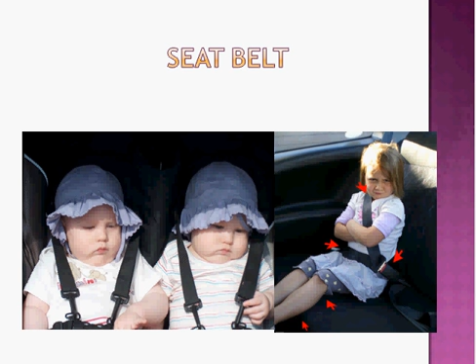According to the World Health Organization, road accidents are a worldwide problem and now result in over 1.2 million people dying every year from road crashes around the globe. Seat belts and airbags are highly effective in preventing death and injury from traffic collisions. Seat belts are expected to reduce the overall risk of serious injuries in crashes by 60 to 70%.

Seat belts, also called safety belts, are designed to secure the occupant of a vehicle against harmful movement that may result from a collision or a sudden stop. They are designed to deliver non-recoverable extension, and are intended to reduce injuries by stopping the wearer from hitting hard interior elements of the vehicle or other passengers.

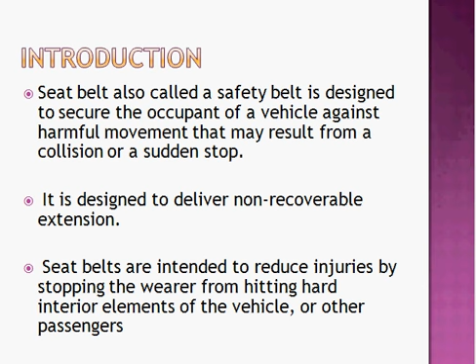Next, we come to the seat belt market scenario. First, we will discuss the global market for seat belts. According to a market research firm, the market for all types of narrow fabric is estimated at US $2.4 billion in 2005, projected to grow at about 3.6% per annum during 2005 to 2010.

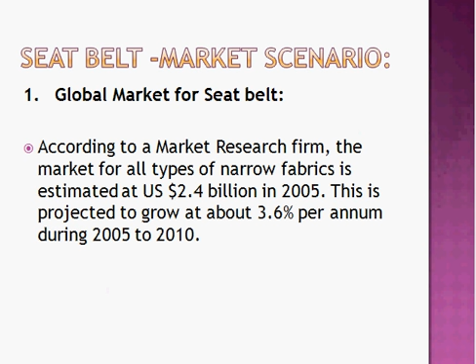Next is the domestic market for seat belts. The growth in seat belt usage is expected to be more than the overall growth in passenger cars, due to the stronger growth of high-end cars with more seat belts. The domestic production of seat belt webbing is around 4.3 million meters.

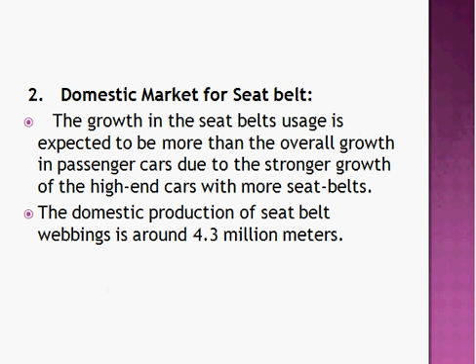Next, we will discuss the types of seat belts: lap seat belt, sash seat belt, lap and shoulder belts, 3-point belts, 5-point belts, and inertia reels.

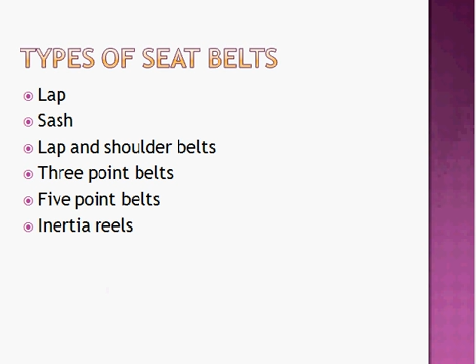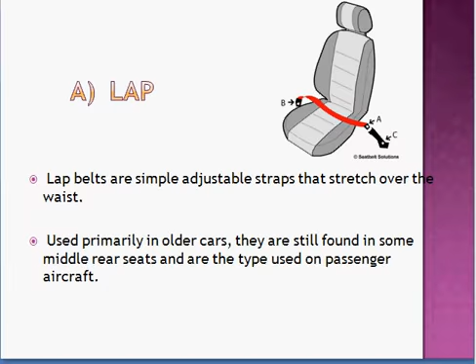First, lap seat belt. Lap seat belts are simple adjustable straps that stretch over the waist. Next, sash belts, an adjustable strap that goes over the shoulder, used mainly in the 1960s but of limited benefit because it is very easy to slip out of in a collision.

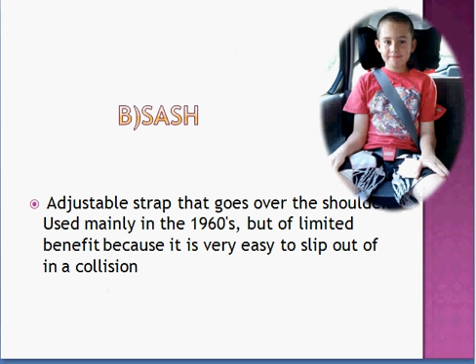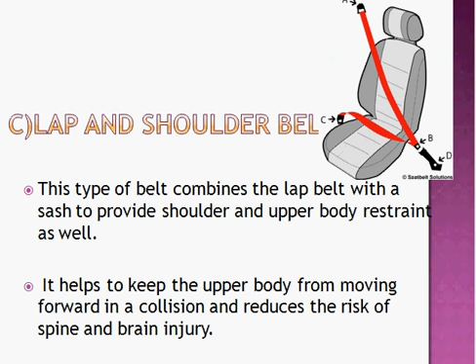Next is the lap and shoulder belt. This type of belt combines the lap belt with a sash to provide shoulder and upper body restraint as well. It helps keep the upper body from moving forward in a collision and reduces the risk of spine and brain injury.

3-point belts: these belts are similar to lap and shoulder belts but are made up of one continuous length of belt material that avoids the stud-based mounting system. Instead, it weaves the fabric through the frame itself and then across the body into the locking mechanism. This design allows the belt to equally spread collision energy over the shoulders, chest, and pelvis.

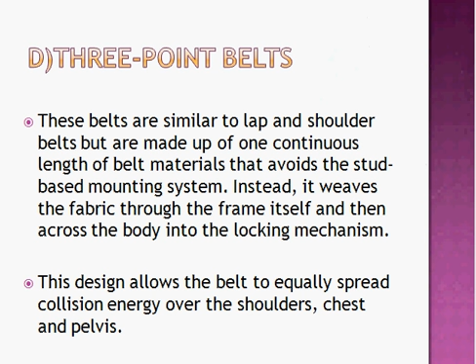5-point belts, most often found in race cars and child safety seats. This style is more restrictive than other safety belts and considerably safer. Essentially, two combined shoulder belts, each mounted to the frame for added safety and stability, are connected to a belt and strap between the legs to accomplish the 5 points to fully restrain the body to the seat and vehicle.

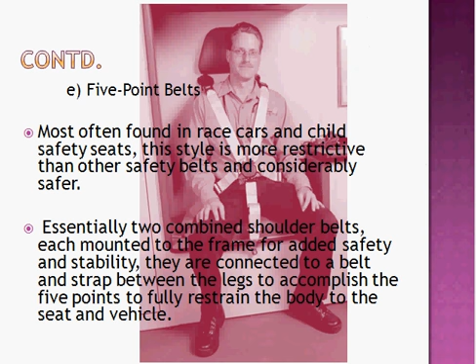Last but not least, inertia reels. Not technically a safety belt, inertia reels are integral in making seat belts more comfortable without losing their inherent safety. These allow the belt to be adjusted for fit and comfort by letting out as much belting as is needed under normal conditions.

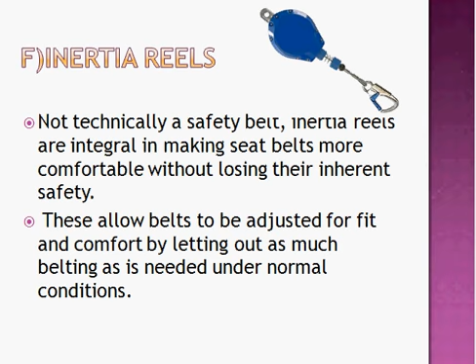Now we will discuss the importance of the seat belt. The job of the seat belt is to hold the passenger in place so the passenger is almost part of the car, which prevents the passenger from flying forward as the car stops abruptly in the case of a collision.

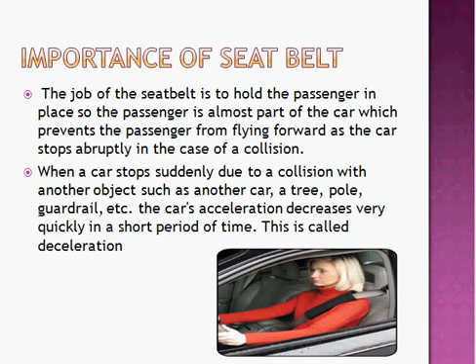Now we will discuss the fiber used for seat belts. Raw materials used for seat belt webbing are nylon, PET, and its derivatives like HTPY.

Nylon was utilized in some early seat belts, but due to its high UV degradation resistance, polyester is now widely used worldwide. Also, polyester scores over nylon because of lower extensibility and higher stiffness.

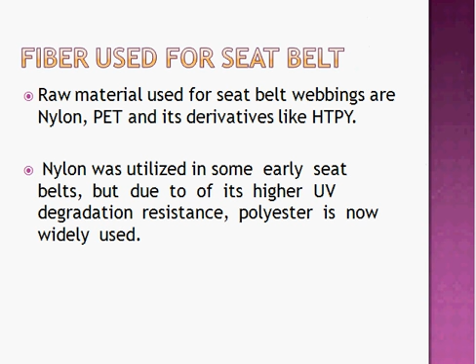Next is the fabric structure. Seatbelt structures can be single layer or double layer and manufactured on needle looms with plain weave, twill weave, or satin weave. Normally a 2x2 twill structure is used.

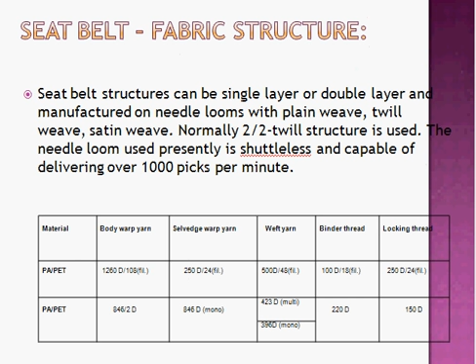The needle loom used presently is shuttleless and capable of delivering over 1000 picks per minute. The seat belts are made from nylon filament yarn or polyester filament yarn, which is woven to produce the webbing pattern. Next is the manufacturing method.

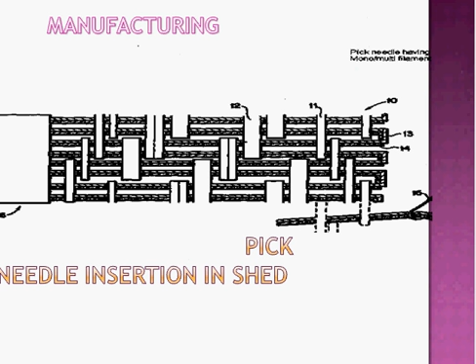This figure shows the pick needle insertion in the shed, and the next one is selvage formation with catch cord yarns. In the needle loom, the weft is inserted from one side of the warp sheet, and here a selvage is formed. The other side of warp is held by an auxiliary needle, which manipulates a binder and a lock thread.

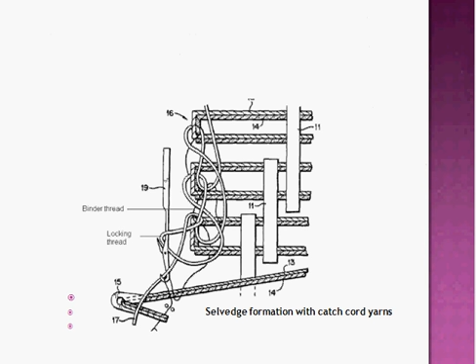Once these are combined with the weft yarn, a run-proof selvage is created. Special care is taken when constructing the selvage to ensure it is abrasion resistant. It is equally important to ensure that the selvage is soft and comfortable to wear.

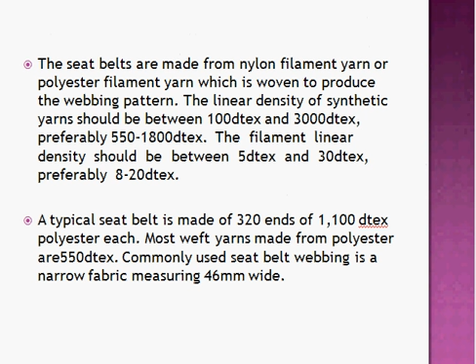In a needle loom, monofilament and multifilament weft yarn is moved across the width of the web in a single shed. A high tension is applied to the monofilament compared to multifilament yarn so that it does not protrude beyond the selvage. Monofilament weft yarns are rigid yarns that provide good stiffness across the web and high resiliency.

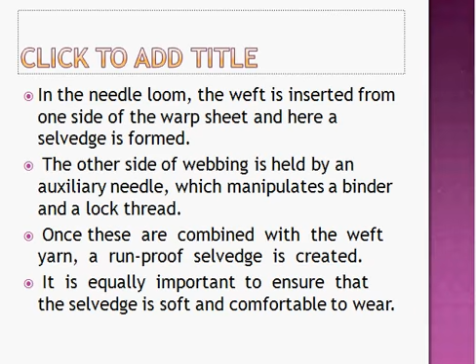Monofilament weft yarns are used under high tension, which controls webbing softness and round shape together with catch cord yarns and finer warp yarns in the selvage than the body of the webbing.

Low longitudinal stiffness and a thinner web give good winding performance with the use of smooth monofilament weft yarns. Selvage warps have about 66% lower thermal shrinkage than body warp threads. Weft threads have 16% higher dry heat shrinkage than selvage yarns. Thus, the woven ribbon is heat-set after dyeing, giving a soft, round-shaped selvage.

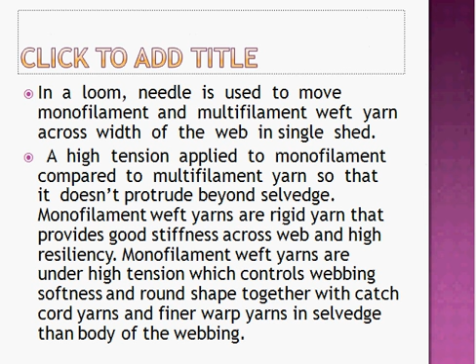Then we will discuss the finishing of the seat belt. The woven seat belt webbing is then transferred under tension to a dyeing and finishing range. The grey webbing is dyed and heat set, while webbing made from spun dyed yarn is heat set only.

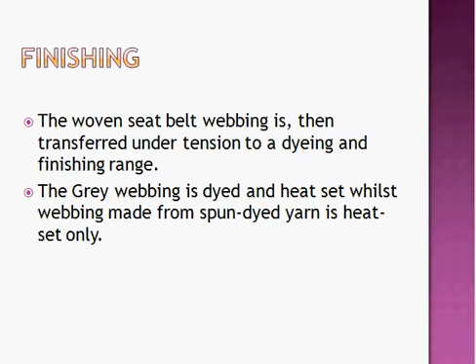Heat setting is undertaken to impart precise extension to the webbing and suppress its recovery in the event of a crash. This is achieved by shrinking the webbing in a controlled manner, which increases the weight of webbing from 50 grams to approximately 60 grams. Seatbelt webbing can be colored by two methods, either by incorporating spun dyed yarns or by piece dyeing. The appropriate technique for piece dyeing polyester webbing is the thermosol process.

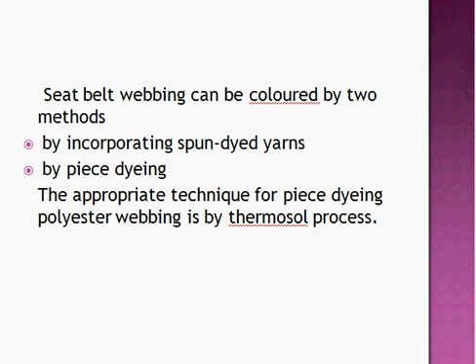Next are the quality requirements of the seat belt. The seat belt is required to have the following properties: static load bearing capacity up to 1500 kg, and extensibility up to 25 to 30%. Then abrasion resistance, heat and light resistance, lightweight, and flexibility for use.

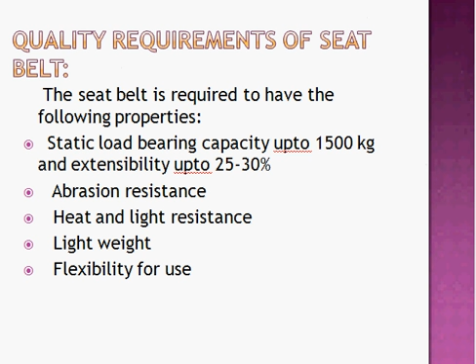Next are the performance tests and standards for the seat belt webbing. These are width, thickness, breaking strength and elongation for dry and wet webbing, abrasion resistance at various environmental conditions and in contact with buckles and fittings, influence of extreme environmental conditions and temperatures, rubbing fastness, and microbial resistance.

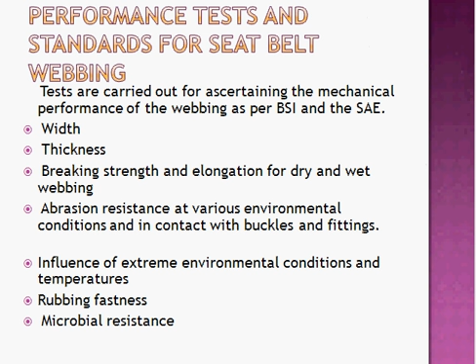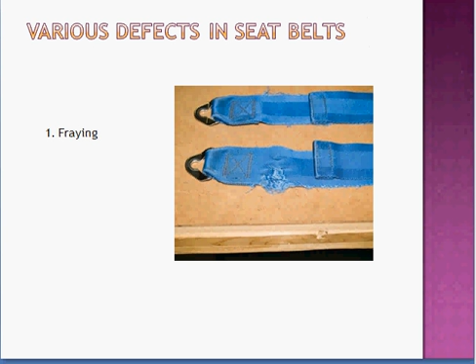Next is UV damage. Over time, UV rays will damage the seat belt. UV damage is more frequent in helicopters and aircraft. Due to ever-increasing concern on safety of passengers during accidents, seat belts show a better holding position in the technical textiles market.